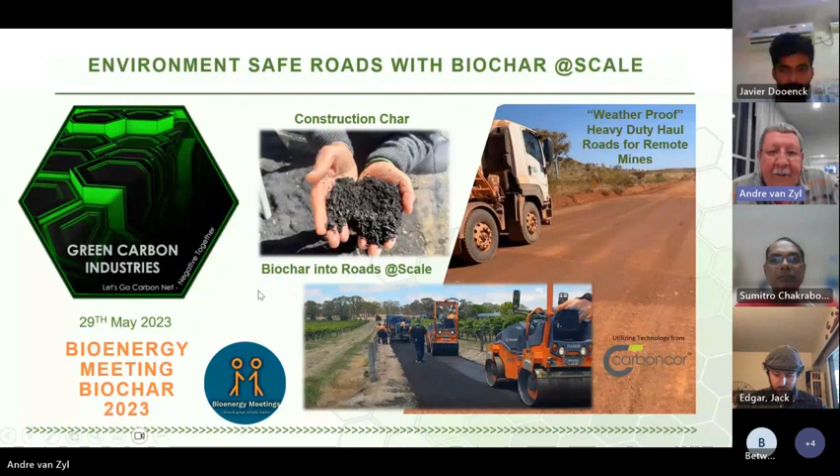Our vision, purpose, values: the first mission or the vision we had was to scale the production of biochar from waste. The industry has been growing and so dependent on agricultural char, soil carbon chars, animal feedstock chars, but that normally comes at a price that many farmers can't afford. So we took a step back and we said, well, how can we scale this production?

And the end game for us, or actually the starting game for us, was to create beyond the small percentages that are currently put into concrete systems with quite success, but it's quite low volumes or low percentage mass that go into these concrete structures. So we managed then, together with a proprietary high pH anionic emulsion system, to be able to even make contaminated biochars inert.

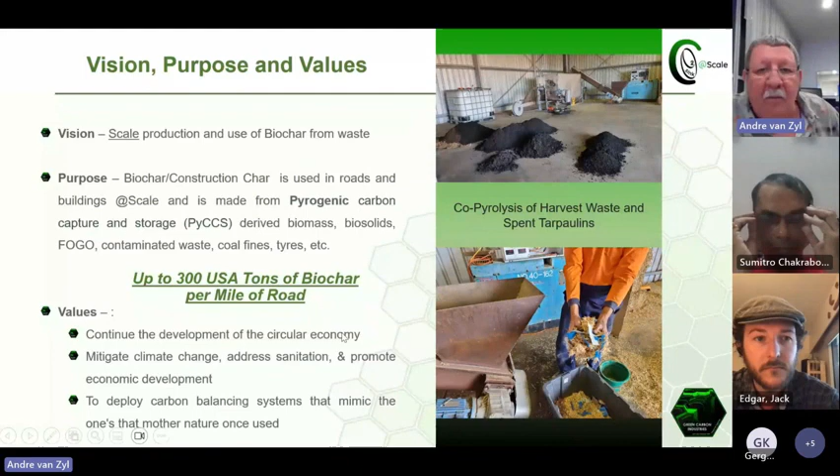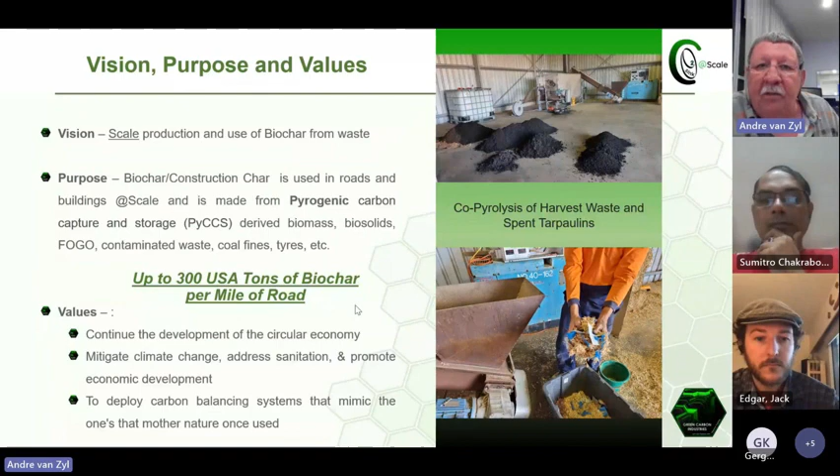On values, we obviously support circular economy. Obviously, with the weather going bonkers, we need to do something about climate warming. And in the end, I think our biggest success was the ability to even use partially pyrolyzed material, partially carbonized material as well. And the emulsion systems help to make it inert and lock it down underneath the surface. So we're essentially mimicking what Mother Nature is doing when she takes a tree and she puts it deep down and turns it into coal.

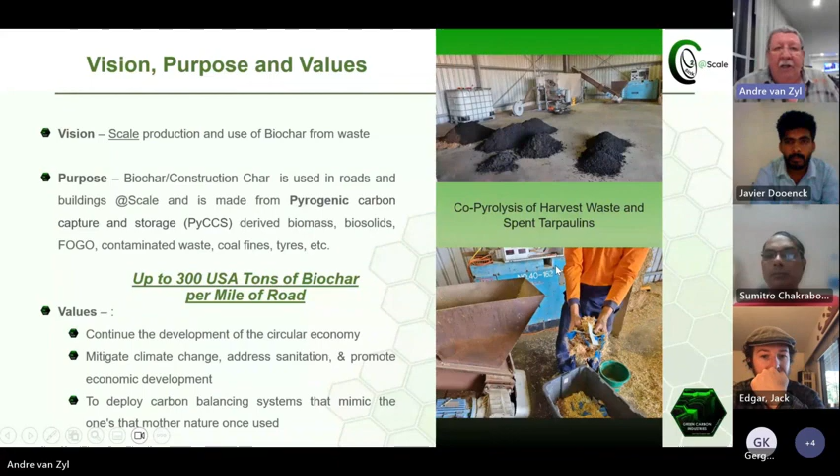Quick mention on the photos here. This is a combination of harvest waste and heavy-duty tarpaulins of various grades and types, from LDPEs all the way through to high density polyethylenes, etc. And on top, the top photo is our first little pyrolysis unit, and all the black heaps in front there are construction char. So that's char made by co-pyrolyzing various types of material. We use the term construction char.

What is construction char? Construction char is a char or a biochar or a carbon black or a black carbon, anything with a carbon content more than 30%. We can use material with carbon contents as low as 30%, and we deem that as construction char. That obviously also includes the high grade agricultural chars if we can't find any other chars. We can use most any types.

The top photo there is a collection of different biochars that was made from wood, straws, grasses, energy crops, biosolids out of the sewage industry, recycled activated carbons out of the mining industry. Basically, with the emulsion systems, we make sure we get the necessary covalent carbon bonds, which are stronger than the standard ionic bonds, and we make it inert, lock it down with near permanence.

The next step then, what we did is we started pre-treating. The interim was blending different biochars for specific applications. The next step then was we started pre-treating feedstocks so that already during the pyrolysis process, we start forming additional types of bonding mechanisms and aggregate replacing material. We then started adding biochar and our emulsions to concrete wastes, reclaimed concretes, reclaimed RAP, reclaimed asphalt products.

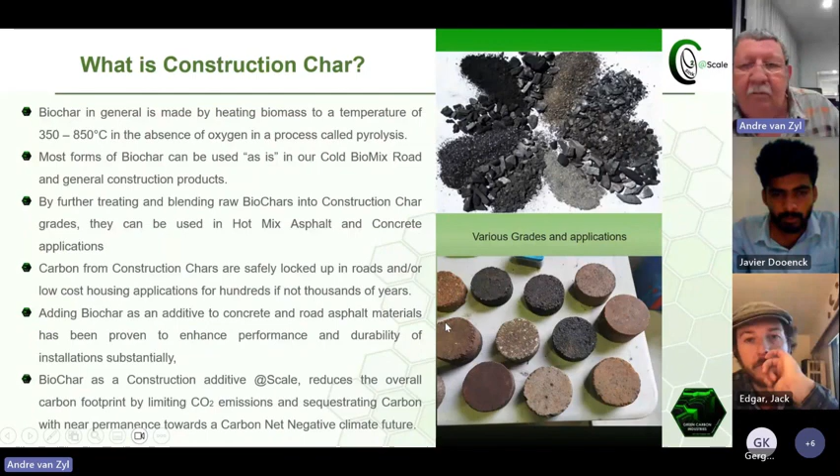We don't use any heat. It's a cold process, cold product. We don't need any solvents because it's an anionic product. It's not a cationic product. So there's a lot more information available that I can provide on further request.

So what are the benefits? Traditionally, for a long time, there's thousands of white paper studies and university studies of the advantage of putting biochar into construction media, including hot asphalt systems. Their biggest drawback has always been they can only do it at very, very small quantities, 2 or 3% of total mass, or in some cases 2 or 3% of total Portland cement content in the concrete.

We jumped straight up to initially 5%, then up to 10, then up to 15, and we have done successful material with as high as 25% biochar content, but we cannot do that consistently yet. Up to 15% we can do consistently. This little video playing here is material that's installed in access roads to wine farms. It's safe for use in the agricultural industry.

Obviously, it's a low cost material, because in many cases you get paid to take feedstock if it's contaminated organics out of river systems, if it's PFAS contaminated wood products or wood waste out of the forest industry, previously burned forests, etc. We can utilize all of that. There's some slides coming to show how we manufacture it.

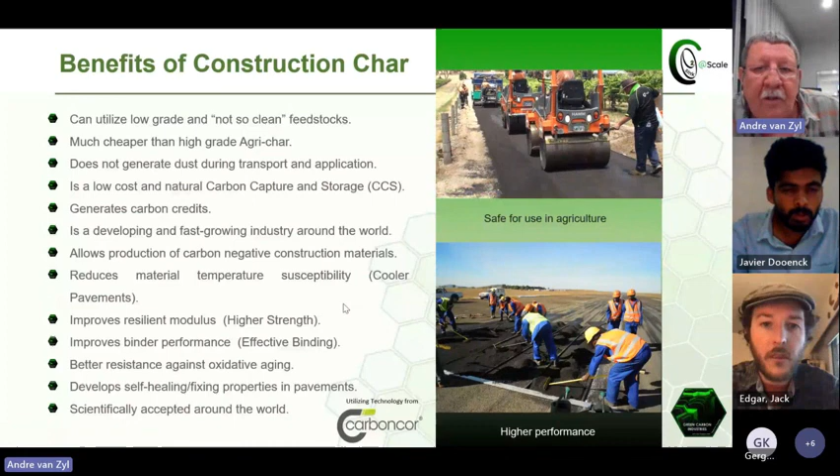On the performance side, we've done extensive combination and test work against most or all of the other types of conventional road systems, and we are in many cases 3 to 5 times better in performance and stability. The material is so strong that if we put a 30mm overlay of the cold premix onto an airport runway, the big birds can come and sit down and we don't get any shearing. So there's a long list of the advantages in performance. This is our favorite little homemade video.

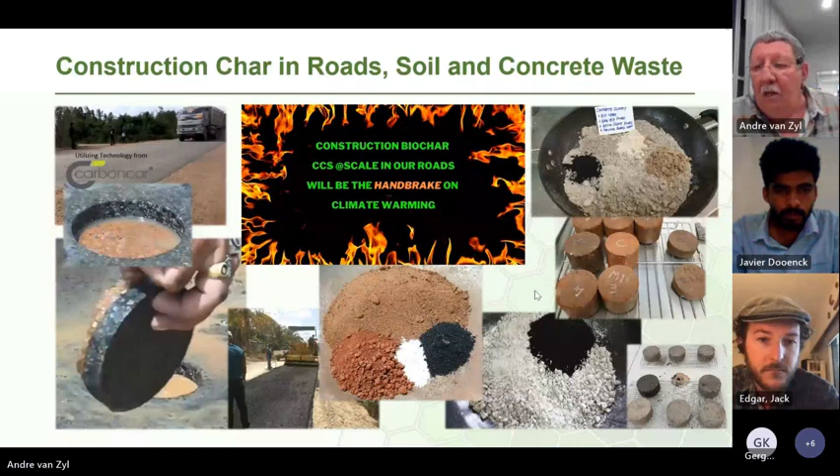We started the slogan saying that with these massive amounts of biochar that we can get into roads, both the wearing course and the road base application, it will be the handbrake on climate warming. Calculations are massive. One example is we did a quarry access road in Thailand, and it was supposed to be a 30mm thick installation because it's heavy duty. Our maximum thickness that we apply normally is 30mm in the wearing course.

We used carbon black from the tire pyrolysis industry as the carbon source for this specific road, and installed it in the middle of the night with hand rollers, because the equipment promised never arrived. Six months later we started doing core drilling, and we were shocked to find that the road, and we drilled many different places, the maximum thickness that we found anywhere in the road was 12mm, half an inch, and there was no cracking, creeping, leaching.

One thing to note is we do not need tack coats or binder coats or spray coats. We can install directly onto a damp compacted laterite road. Top right is combinations of reclaimed ceiling boards, crushed ceiling boards, brick waste from the brick making industry, and of course biochar. There's always biochar that goes in with it. These are very bad high clay content soils. Normally we need to put a little bit of limestone powder in there just to stabilize it a bit, but with the extra biochar loads in there, we get very good surfaces.

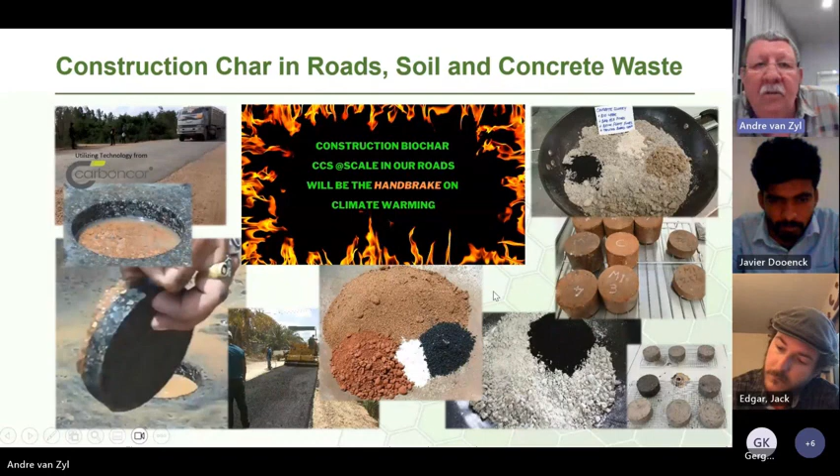The process is very straightforward actually. The first step is to make emulsion, and that's a containerized type emulsion plant. We utilize the same bitumen as what is used for the conventional hot mix asphalt industry. We just receive the bitumen at heat. We don't heat it any further.

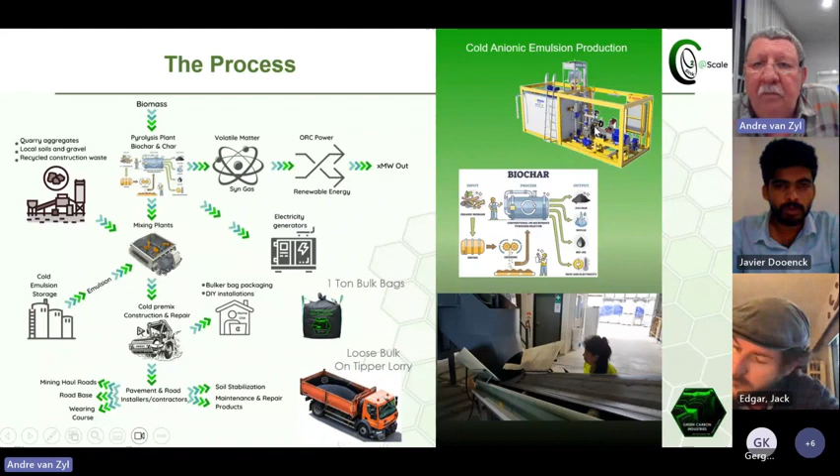We turn it immediately into a cold anionic emulsion. With this equipment, it's a fairly straightforward process, no solvents required. And then we can store the emulsion for up to a year in tanks. A long shelf life. Again, no heat or solvents needed to keep it at the same viscosity as water.

Obviously, biochar can come from many different directions, many different types. We are currently working on technology to speed up the partial pyrolysis of all kinds of combination feedstocks. Because we can handle or utilize partially pyrolyzed stuff, you can start with much higher moisture content. So it doesn't matter if it doesn't come out fully pyrolyzed. So there's a lot of advantages in scaling up the volume of biochar production.

So the emulsion is stored in tanks. If we do very high level or high duty wearing course materials, we do use some controlled aggregates from quarries. The biochar plus the quarry material goes into a planetary paddle mixer. Dry mix for about 20 seconds, then add roughly 10% emulsion, and wet mix for 20 seconds, and the material that comes out can either go into 1-ton bulker bags with a shelf life of a year.

We ship cold mix products from Malaysia to 14 countries in the world, and install permanent roads in the middle of nowhere. Or if the material is put onto the back of tipper lorries, and this material contains up to 15% biochar, then the tipper lorry life of this material is up to 2 to 3 weeks, depending on weather conditions, which means you can drive for 2 weeks and then go and install a brand new high-duty road in the middle of nowhere, not needing any heat or solvents.

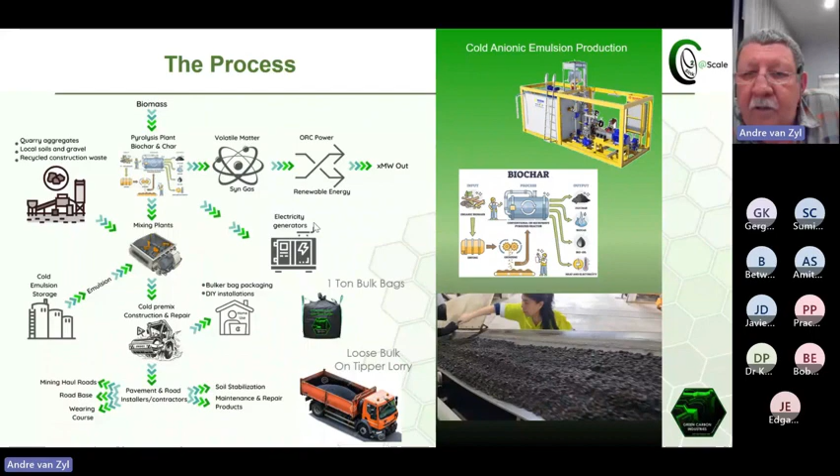This is a little video of one of our production plants. That's the cold premix coming out after it's mixed. You touch it, it's not sticky, there's no solvents, there's no heat involved, obviously. And that's samples that are taken for quality control.

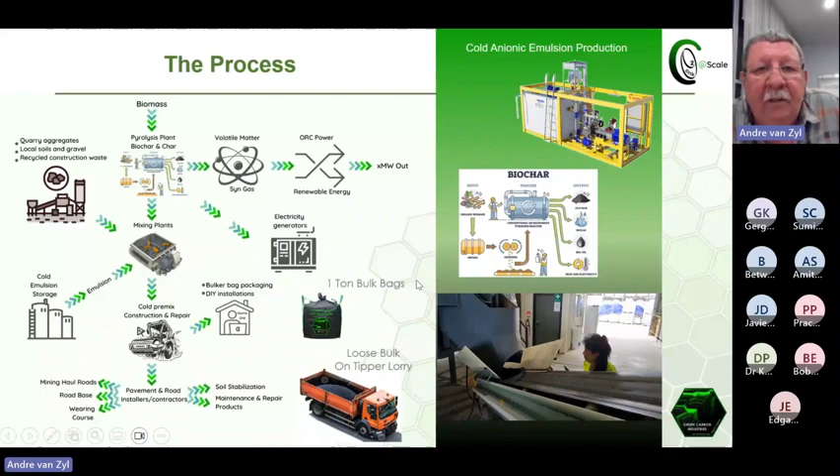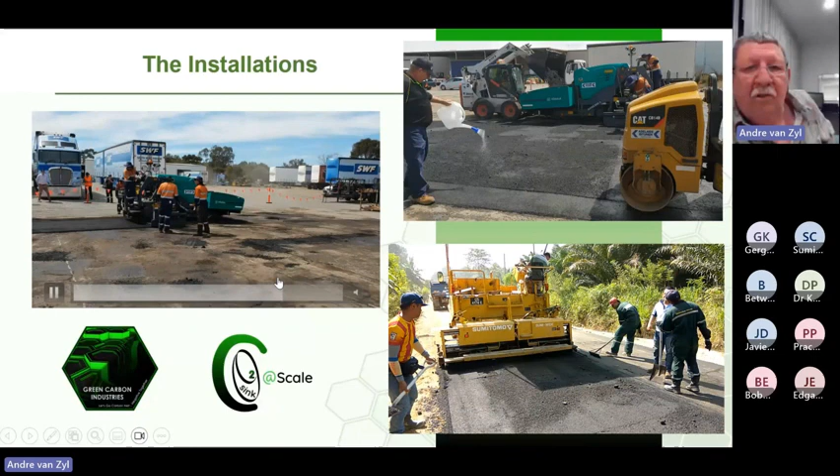Just a few examples. We did a thin overlay, 20mm overlay inside a truck yard. So this is one of the big trucking yards, and this specific space here was in very bad condition because that's where the trucks do the U-turns, and the side shearing obviously causes a lot of damage. This was actually the compaction of that area. We only need lightweight compaction equipment. We don't need the heavy stuff. Installation is much quicker.

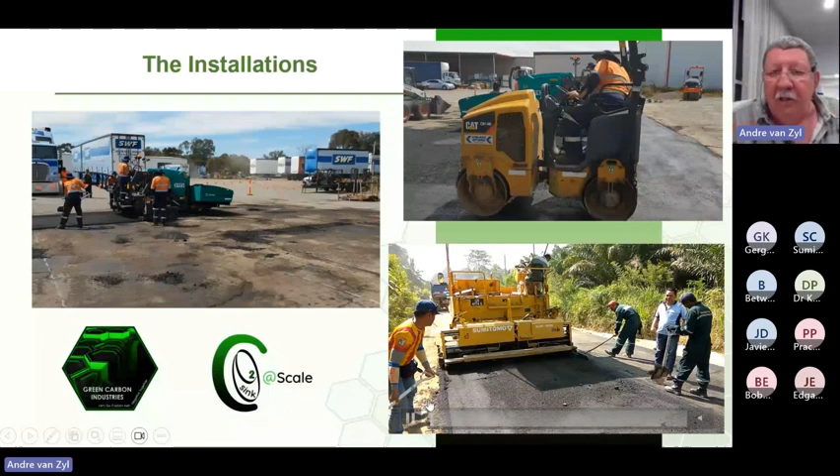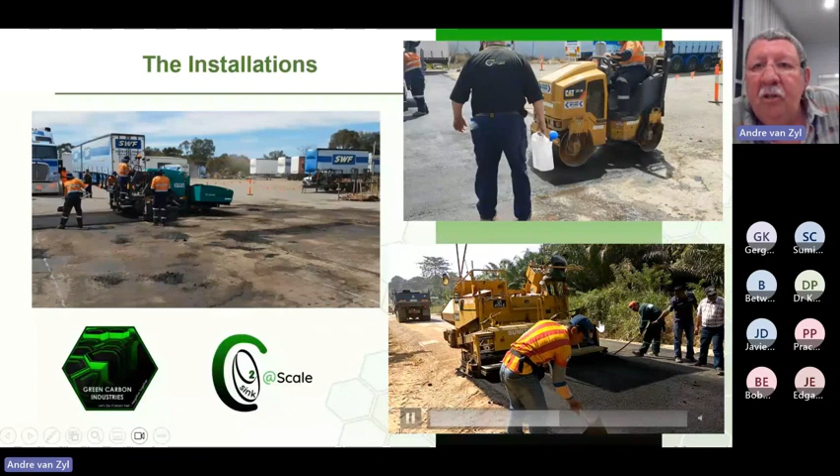Utilizing a standard paving machine, heat switched off, no solvents needed. The cold premix goes through the standard paving machines. With the advantage, the machines can actually move much faster because the stuff is not sticky, so it doesn't shear. So with one team, one paving machine, and one compactor, we can install up to 3 to 4 kilometers of road in one day, which is 4 times more than what you can do with conventional hot asphalt.

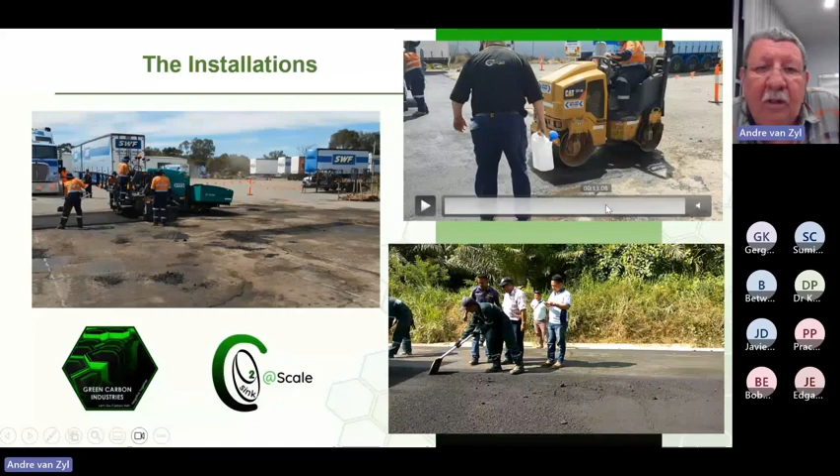A quick note on financing and demand. It's always been extremely difficult to obtain the necessary financing to scale up or ramp up the cold premix operations that we started in Africa and in Asia. And dare I say, one of the biggest hurdles or stumbling blocks was the political pressure that we get from the hot mix asphalt guys. And the reason for that is our products are up to 30% cheaper per square meter installed, or per square yard if it's America. So obviously we're seen as a threat, and there were a lot of hurdles.

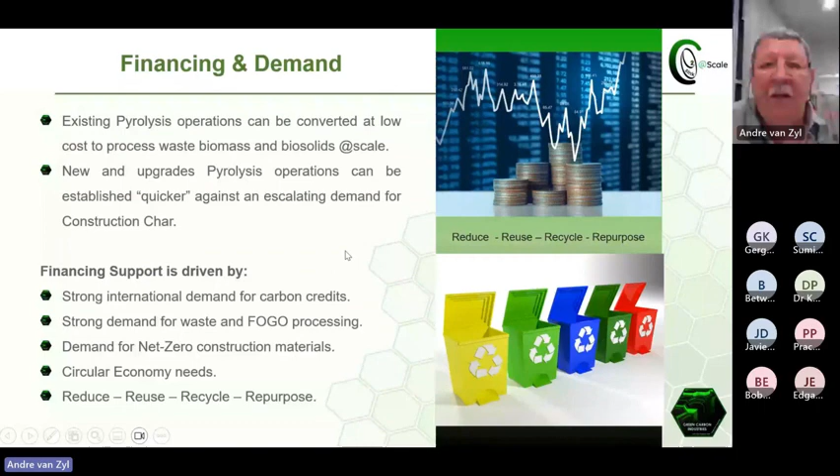Just a few slides on Cameroon. This is access roads to mines. This one was about, I think about 85, 87 kilometers long. Installed in 2007, I think, and it's still there today. Because of the fact that our roads are waterproof, biochar is naturally anti-wetting.

Biochar conducts heat, so the road surfaces are a lot cooler. We don't get cracking and creeping, and we have a penetration bond into the road base. It's not a layer of glue in the form of a tack coat or a spray coat. Our roads tend to last a lot longer, and it also protects the road base, which is actually doing the work, which makes for a much longer living road.

This one here, we've done thousands of tons of material as military roads in East Malaysia. The military loves working with the products because it's easy to install. They can do it themselves. This is heavy duty factory floor installations for a major big group. It's called Cargill. It's one of the biggest palm and sugarcane industries in the world.

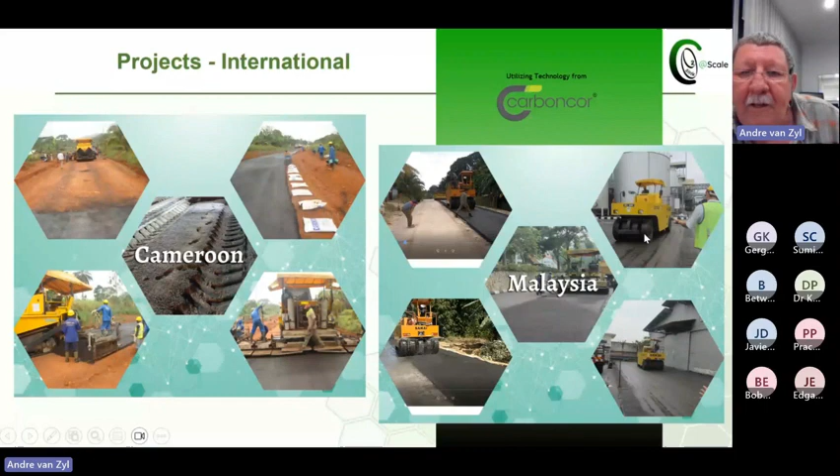Myanmar, before things went a little bit upside down there lately with the politics, but we've installed many roads in Myanmar. Material was shipped from Malaysia. Vietnam, we have two. There's a third major big production plant going up there now. We have one in Hanoi and one in Saigon, Ho Chi Minh, producing. That material is used for small streets, large streets, motorways. We've done a section of the new motorway upgrade between Ho Chi Minh and Hanoi.

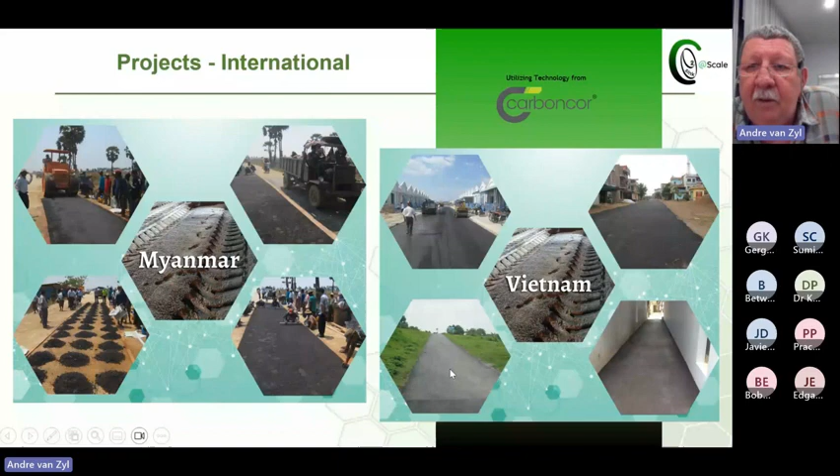Community centers, paddy field roads, so in all amongst the rice paddies, all the roads get sealed with this. India, we don't have a production plant there yet, but at some stage we were exporting about 500,000 bags a year to India for installation. Timor-Leste, we've done many, I think must be more than 90 kilometers of coastal roads.

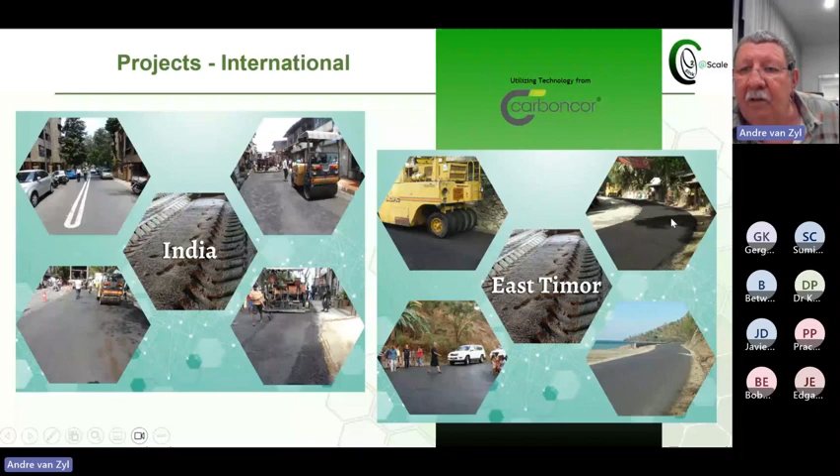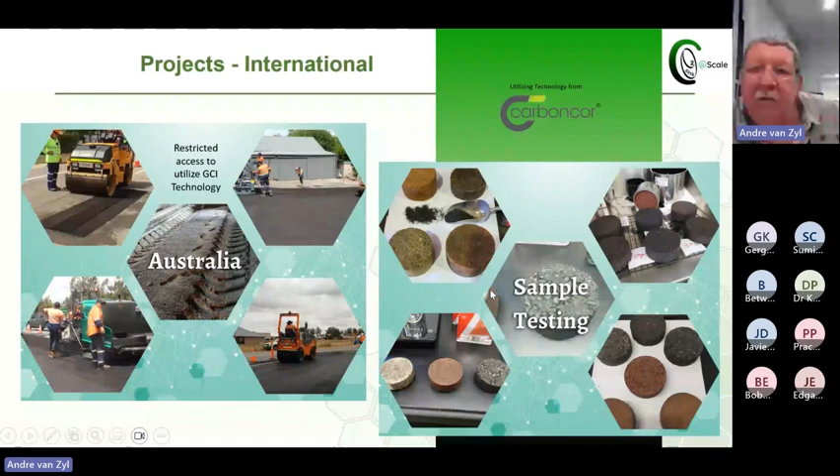Australia, obviously we've done a lot, including haul roads for mines, but we have already signed away the licensed technologies to utilize the technology in Australia. So the world is available. Australia and New Zealand is locked out already. And currently we're continuing sample testing different types of materials, different contamination levels, and obviously working towards very dedicated construction chars in general.

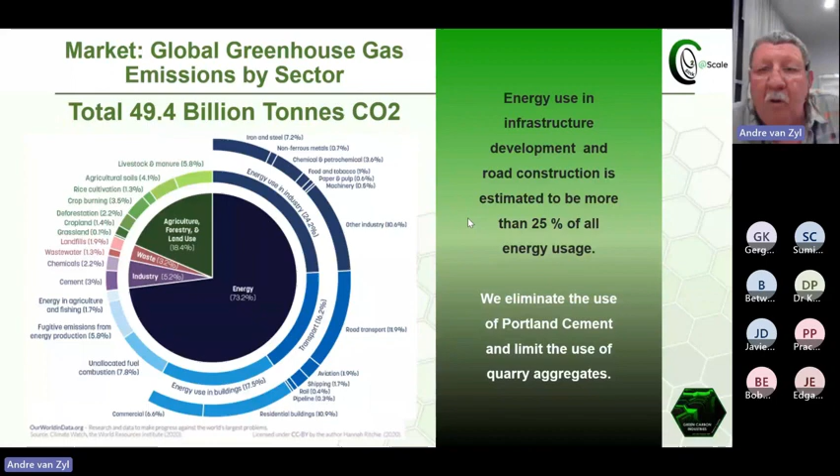This slide, this is, I think, information that's available from many different sectors, but this speaks for itself. If we can just replace conventional high CO2 footprint material in the construction industry, then we already take away 25% of the headaches in the world. And if we work together, it is doable because we can scale it up. We've done some little race courses as well, so we're racing forward into the future to make the world a better place. And I thank you for the opportunity.

It's not easy to keep the presentation short. Happy to take questions now or later. Not sure when